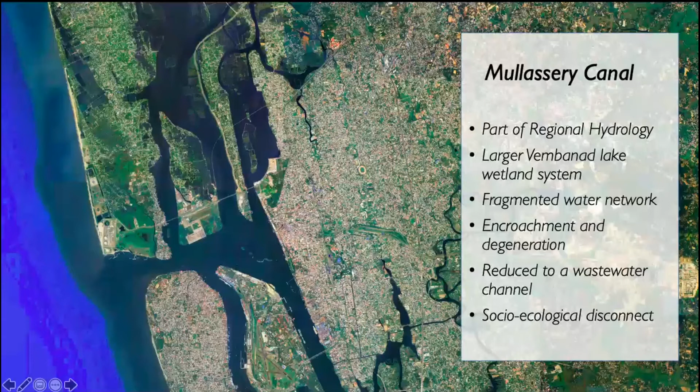Many times it was covered to make way for other urban services. It was degenerated and eventually it was reduced to a wastewater channel. As it was disappearing from the map of the city, it was also disappearing from the minds of its citizens. Eventually, this has led to a socio-ecological disconnect. For the proposal, we imagined how this canal can enable this city to revive its forgotten relationship with its water system for a resilient and inclusive future.

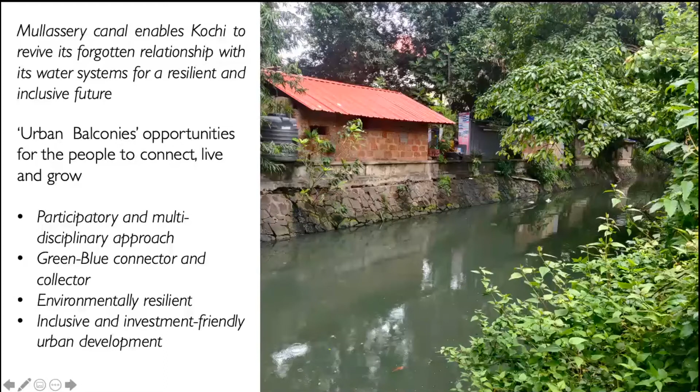The concept urban balconies is definitely inspired from creating a connection or providing a platform. So these balconies become opportunities for the people to connect with the water, to live with the water, and to grow. Other aims were to have a multidisciplinary approach, to create a green blue connector and collector, making environmental resilient design, inclusive and investment friendly development.

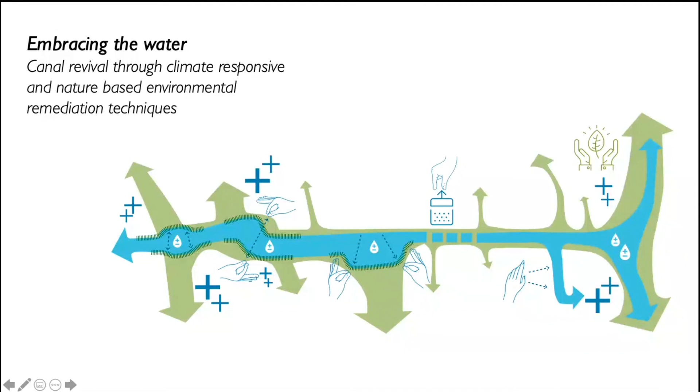There were three important principles. The first was embracing the water. We wanted to make more room for the water. We wanted this canal to be more climate responsive and definitely improve the water quality and its overall ecological functions. The second was integrating the urban programs. And these programs were intended to be adaptive, flexible, and replicable.

The nature of the balconies that we are introducing differs depending upon the availability of the resources in their neighborhoods. So they can change their character. They could be interactive at some places. They could be nature oriented at others. They could be more oriented towards urban functions or cultural functions.

The third important aspect is weaving the communities through our program to create inclusive, safe, and vibrant platforms. So, this is the part where it is also very crucial because through this we're trying to create opportunities for the socio-economic regeneration of this area. Now I invite Subhagya to tell you about our thoughts on the master plan.

While Shiva explained us the three important layers of our concept, our vision is to transform Mullassery Canal and its interconnected resources into a green-blue collector and connector through an environmentally sensitive, investment-centric urban development approach. We propose a resilient solution to canal regeneration that is scalable, adaptable, and climate responsive. Our priority was to review and study the canal system, accentuate the existing destinations along the stretch, through a series of urban balconies that enable unhindered access to the water.

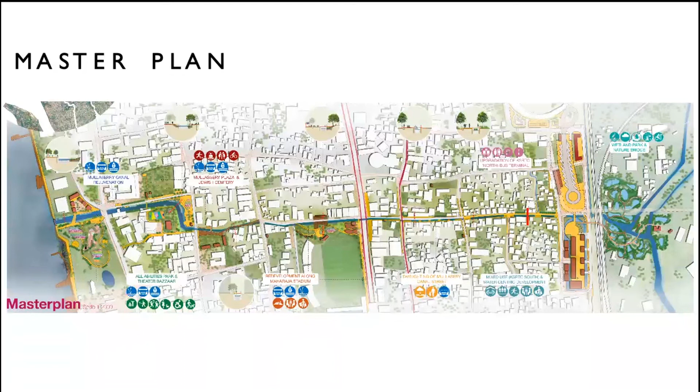The intervention was at two levels. As you can see, our plan depicts a dumbbell shape, which is the two major activities on two ends of the segment and intermediate connection with the canal and adjoining activities. So the two-level intervention was environmental remediation and community mobilization across the canal stretch, and localized demonstration solutions for sites A and C, which are the two important ends of our segment.

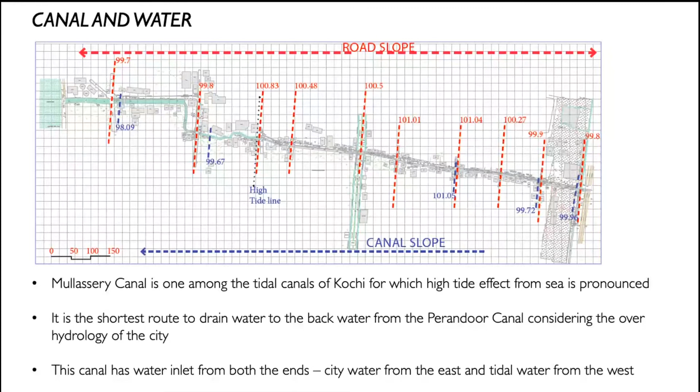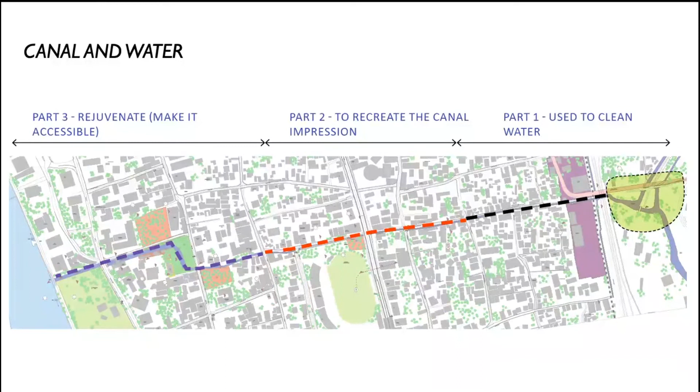So with that, we decided that the canal stretch can be divided into three different segments. Right from the east, where we have the railway station, that area seems to be the low-lying area. It gets flooded on any rainy day and causes hindrance. So we thought that area can anyway be developed into a wetland park, which can purify the water and feed the canal. The second segment, where we have limited scope to develop, was used for daylighting the canal, and the third segment was more opened up to create more accessible and visual connection with the canal.

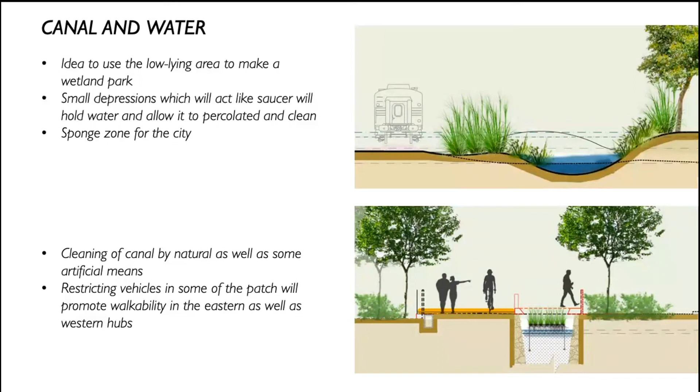I will quickly take you through the sections which we thought of for each segment. Starting from the wetland area, we created small saucers along the area which can hold water, percolate it, and at the same time filter it and then feed the canal. In the first stretch, we were able to curtail the vehicular traffic from the north and south of the neighborhood, due to which this street was able to be more pedestrian and cycle friendly. And the daylighting was done to the canal by natural filtration techniques.

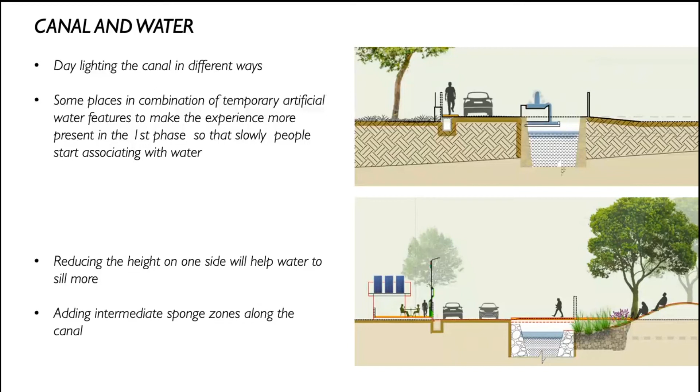In the central segment, because of the constraint of the road section, we thought of introducing some artificial water body, a small bit of it, in phase 1. That was very important because the moment we create a connection, people need to feel and see the water. So the strategy was such that in phase 1, while the cleaning of water happens in the first segment, the second segment psychologically prepares the mindset of people and connects them to the water through small artificial water features, which can later be taken off. By the time the canal water is clean, the canal is eventually exposed and accessible to people. At some places we also created smaller sponge areas along the canal, and allowed it to spill over with softer edges. Next, please.

And at the last bit, where the canal meets the sea, we have tried our best to open up and give softer edges and more connection to the people, not only by creating floating islands, but also by creating gabion wall edges with vegetation along the soil, so that the influx of water is harmless, with no erosion, basically.

Go to the next, please.

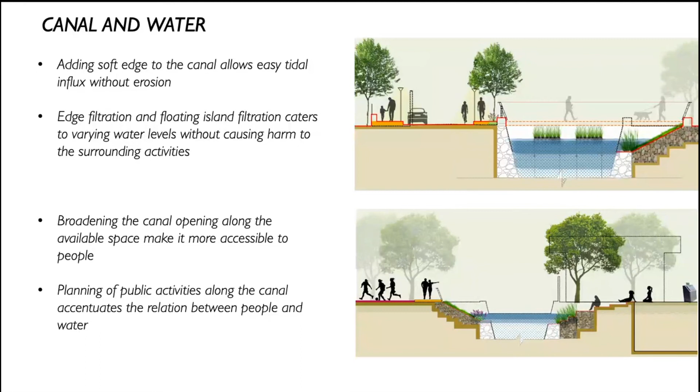So the east site, which is called Site A in the competition, we thought has the potential of a high-value transit-cum-mixed-use hub with a wetland park. It meets three goals: one, demonstrate how a wetland can be used for treating water while hosting large-scale infrastructure; transform an unutilized, stigmatized, and polluted peripheral area into investment-friendly real estate; and create a value addition demonstrating how to foster the people-nature relationship, enabling the first two goals.

Now, here on the east side of the site, a wetland park is proposed off the canal to treat polluted water and serve as a green sponge to manage surface water, maintain its ecosystem and water quality. The interpretation-cum-education center acts as an experience center to educate and engage the community for mainstream natural conservation. Together with the landscape and clean water, it became an inclusive public space, a destination and value addition to the city.

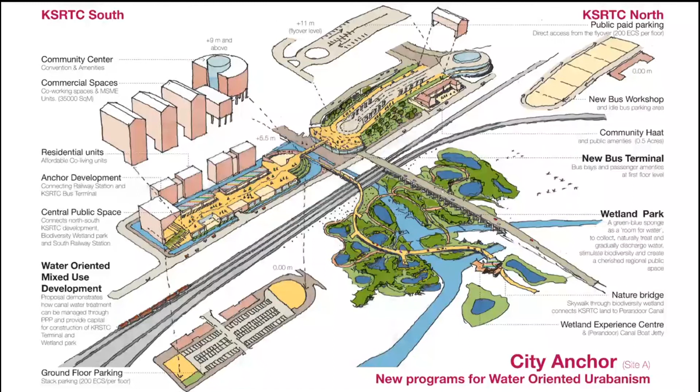This also gives you some views where you can see the pedestrian boardwalks connecting the public spaces at upper level and to the jetty and to the bus terminus. The source water from the canal has been cleaned and allowed to stand, percolate and clean, and then fed to the canal, improving the water quality of the canal.

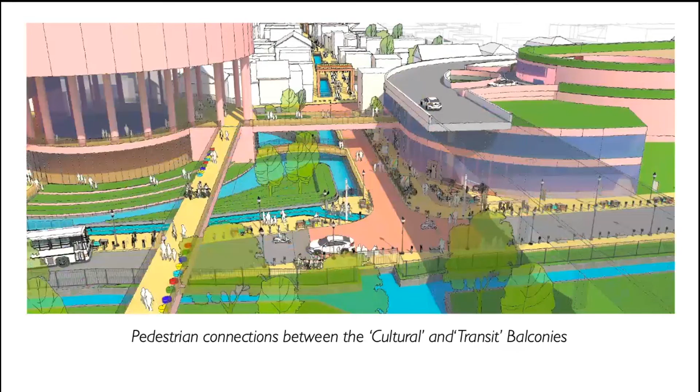This is again a view connecting the public spaces and how the water-oriented development of the South KSRTC site can be done more efficiently. Yeah. This is a section showing, from the east side, the proposed jetty to the KSRTC site and the boardwalk through the wetland area, and how it would enhance not only as a bus hub but also a natural space for people to connect back to water, connect back to nature.

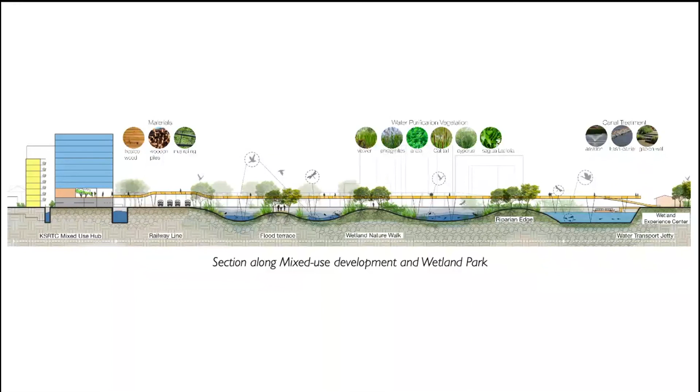Yeah, now I can ask Shiba actually to continue.

At Site C, our aim was to combine the soft interventions with the building upgradation and canal front placemaking. So we tried to use the green spaces which are all along this stretch, as you can see in this visual, mainly along the canal edge and along the seafront, to create integrative and inclusive infrastructure and pedestrian-friendly movement. As Subhagya mentioned earlier, this is the part of the canal which is most accessible to the people, where you can go closest to the water. So we tried to focus on maintaining the quality of the water.

This area has three important stretches. The first one, here we have a boardwalk. The boardwalk connects the local metro station, and the aim here was to improve the visibility and improve the connection. As we move towards the west, we have the Mullassery Plaza, which is where the canal takes the bend. This is also an important junction because we have the market junction, crucial institutional areas, and as we move further, we go towards the famous Broadway. Towards the end, we have Priyadarshini Park. So we imagined it as an all-abilities park. We also introduced a theater bazaar as an urban function, and a sea view deck as another urban balcony.

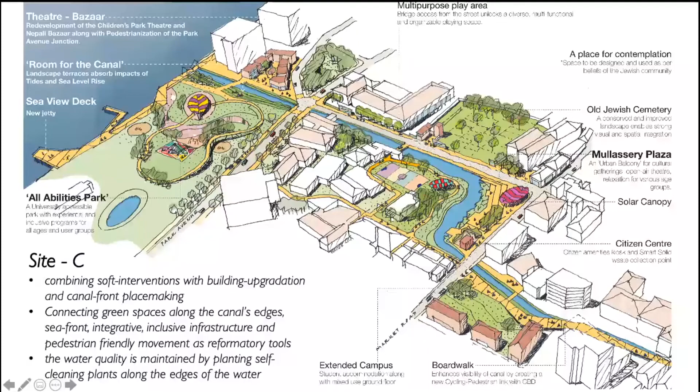So what we have here is a view of the Priyadarshini Park. We planned it as an all-ability park, so there was a great emphasis on accessibility and providing children-friendly activities. Another aspect was articulation of the edges. For example, along the sea, we have other important green open spaces or public spaces, like Ernakulam Jetty and Subhash Park.

So the articulation of the boundaries was aimed at creating better integrated spaces so that you could enhance the experience of the visitors. The low-lying areas, as you can see in the sections, we proposed as water retention ponds. We proposed a new jetty as an urban balcony. So the jetty also represents a culmination point of the journey that the canal takes from the city to the sea.

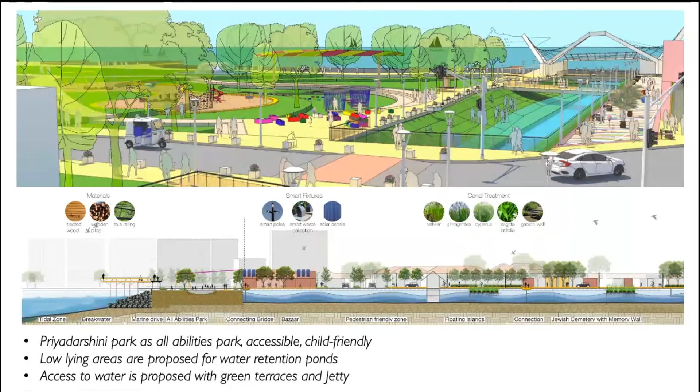This one is a view as we move from west towards the east. So we made changes in the road section. We tried to improve it in order to make it more pedestrian friendly. We also felt that this area lacked connectivity in relation to the canal, so we also proposed pedestrian bridges.

Towards the left side, because here we had more private buildings, we could not do much in terms of urban functions or other functions. So what we proposed was articulation of the boundaries of these areas so that we can enhance the transparency and we could give more integrated greens.

An example of this is what we see here: a memory wall which was created from the boundary of the cemetery. The cemetery itself was imagined more like a landscape of contemplation, but we used this opportunity to create this memory wall where we can project, we can display the culture of the city in relation to the water, or its multicultural history.

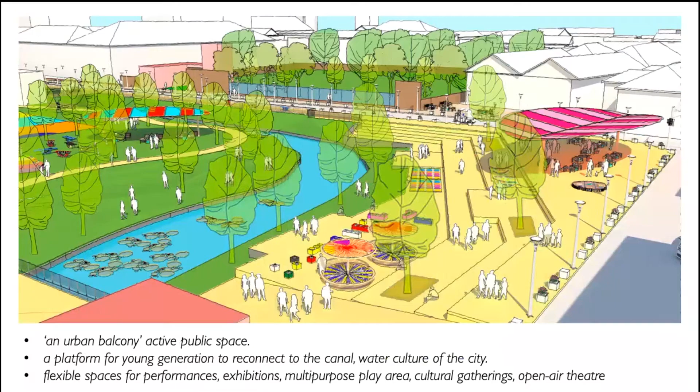As a collector, it collects the citizens from other parts of the city also, and as a connector, it connects the citizens to the canal, or to the culture of the water.

So I would say that the nature of this space can vary. For example, if the city organizes an exhibition or a fair, it could be very active, it could be very crowded. But at the same time, we try to create these natural edges of the canal. So it could also be very serene and very relaxing, in relation with the landscape. So the flexibility of these spaces becomes its strength.

So we can end the design part here. But then another important part comes, because this was imagined as an executable project. So its timeline and its project management was also crucial. We envisioned this timeline in relation to efficient utilization of resources, and to engage the stakeholders, which would be pushing this project further. We imagined a phase-wise execution.

Your approach towards this competition seems to be exemplified by small, personalized and manageable inserts, as indicated by your title, Urban Balconies. So, would you say this approach was derived from the tight density within the precinct and reflected an acknowledgement of the relation between the inside and the outside?

Okay. So, Neha, to an extent, yes. But to just give you a brief, while the bigger interventions were on the east and west side of the canal, we were keen on giving an intervention which was more scalable, adaptable, and the third thing is replaceable. So these three aspects were very important, and creating these spaces with respect to the human scale and the canal, because ultimately that is the interface what we were looking at.